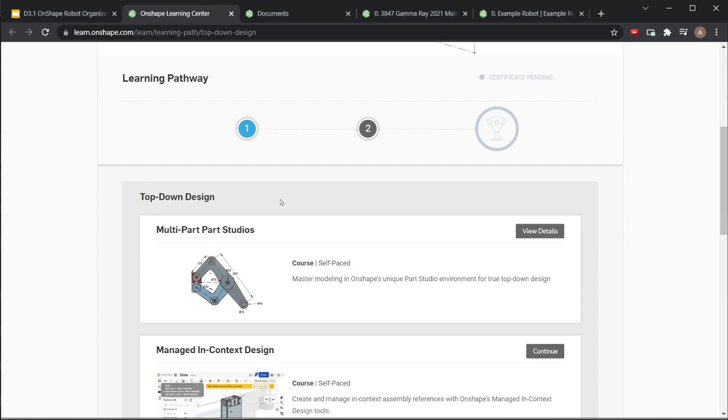They have the full learning pathway on these 3 different types of some of the different things that we use to make our robot process work, and they're going to have activities and everything for you all the way through it. So I highly recommend doing that. It has a lot of really nice stuff, and you can go through the videos pretty quickly. You don't have to listen to all of it, and you can speed them up and skip through. But it definitely is a nice way to get comfortable with a lot of the individual tools. And this presentation will go over a lot of the concepts, but not necessarily exactly how to do everything.

So the idea with top-down modeling is that we're going to use a primary document that's going to hold a lot of the information about the entire robot. And then in separate documents, we're going to use that information to make the actual robot parts and make sure everything fits together and make each individual mechanism.

And so if we do it all right, if we update the sketches inside that primary document, or if we update different parts of that primary document, all the other mechanisms are going to update and change the way we want them to. So it keeps everything in a nice cohesive unit. It makes sure everything in the robot's going to work together, and we can keep using all aspects of the robot, and multiple people can be designing, and it just kind of all works.

What this means is we're going to have multiple documents. So in our OnShape folder, what it looks like over here, and we can actually see the true one. So we have this folder that is Gamma Ray. The 0 in front of it just helps us put it at the top of our folder organization. So this will get off of 0 once we're making a new robot. The 0 robot is whatever we're currently working on.

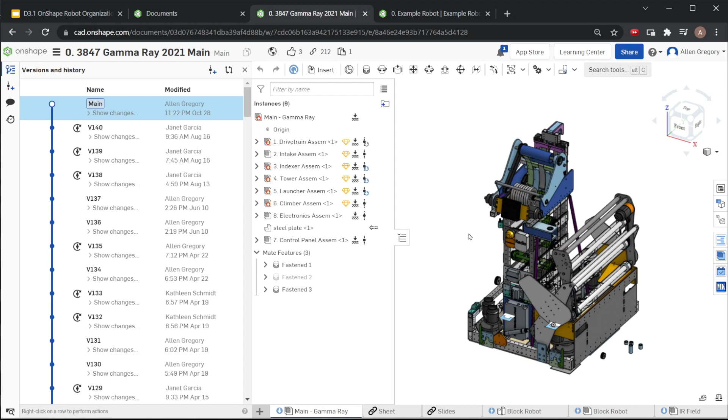It gets a little crazy. So this is version 141 of this robot right now. It's very possible you're going to be versioning 4 or 5 times in the span of a few minutes, just spitting out versions if you're going back and forth between documents and you just see how their updates affect each other. And it doesn't affect anything to just make a new version.

So I can just hit create version right here, hit create, and it's fine. And you can just do that over and over again. We don't really need to put too many comments in on any of just the minor versions that we're doing. It's not a big deal to tell them what they are, or name them in any way.

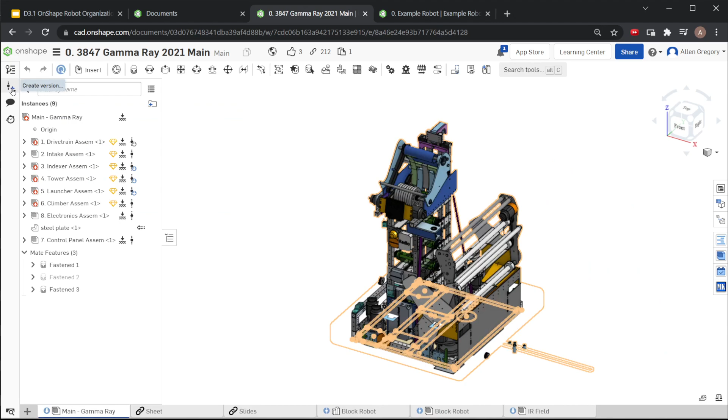When we do create version, if there's some big change, you can definitely go in, put a description, put a specific name in there if you want. But most of the time, if it's just a minor update, you can just leave the number and move on. But we're going to be doing that for pretty much all of the documents constantly as we edit. Anytime you make a change, even if you edit anything and you leave, you should always make a version. It's almost like saving your work.

OnShape saves everything for us all the time, but making that little version will let everyone else in other documents see the change has happened, so they don't have to go and check or anything.

There is a tool called pin reference that lets us lock versions if we don't want certain things to update. We shouldn't really be doing that for documents we control. It is useful for things like the MKCAD CAD library, where other people are owners of those documents and we're just importing them and using them. It's useful to pin reference, so if there's weird updates we don't want, we can make sure we're using the correct version of a certain external document.

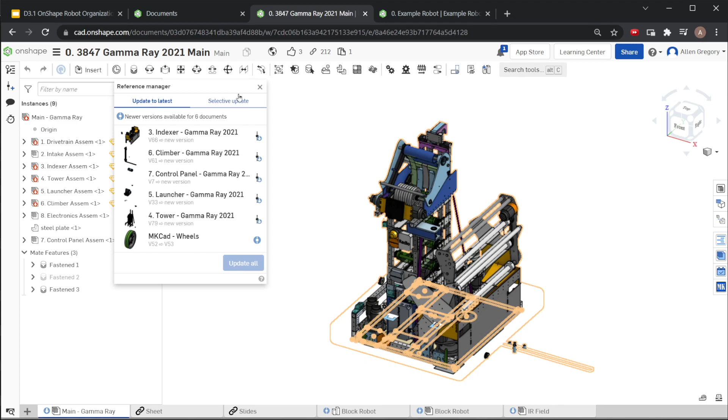So if you click up here, you can update all of the documents. We have a couple that may need some updating. If I click this, it'll let me update all of those different documents. But like MKCAD wheels, oh, it might actually let me update that, because that is a full version update. So we can go in and get all of these changes and they'll propagate into our full assembly. Slowly, but it will. Okay, we'll come back to that.

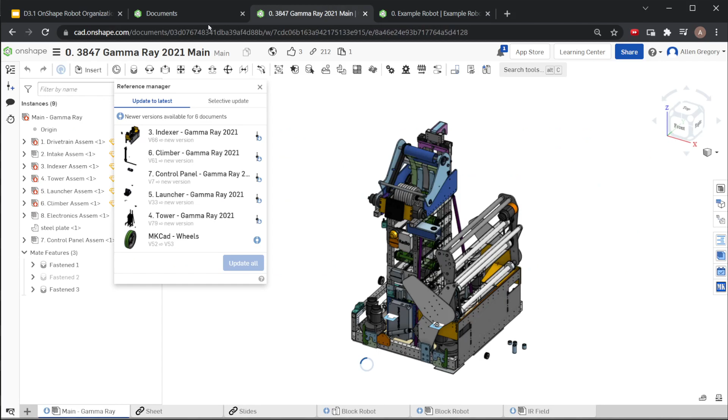When we create all these other mechanisms and work between multiple documents, it's very useful that we keep the relative positions of the parts in the same space. This isn't necessarily important if you're making a single part in a part studio that we're going to import into the robot, but when we have an entire subsystem, it becomes more important. So if we look at the indexer part studio, when it loads, we'll see the origin is in the exact same spot as the origin of our main robot document and all of our assemblies.

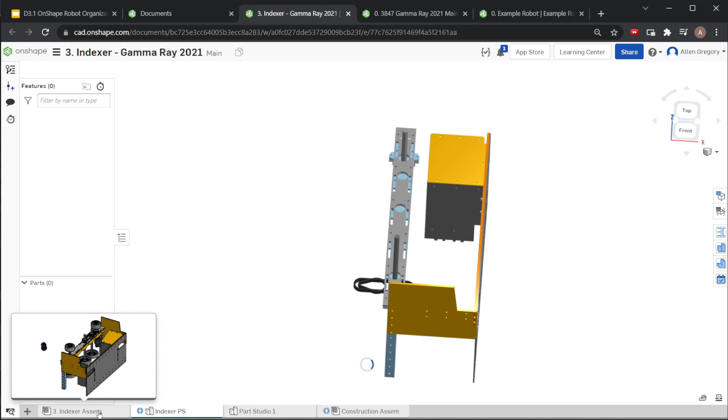So when we insert them into an assembly, OnShape knows where the origin is and automatically puts the part in the same place in relation to it. That makes it really easy for us to mate things and make sure certain parts stay in space where we want them. If we move a hole on some other part, that part doesn't necessarily move with it. If we want our intake to stay the same distance from the ground, we can do that easily with the origin maintaining the same location in each document.

OnShape, of course, is not loading well tonight, so that makes it a little trickier to show what I want. Why not? Okay.

Okay, so this is the example robot for a couple other things later. This is loading fine. Okay, there it goes. All right. So this is what I want to see. So this is the part studio. This is where we actually create all of these panels, any of the custom parts like these shafts. All of these custom parts are modeled in this part studio.

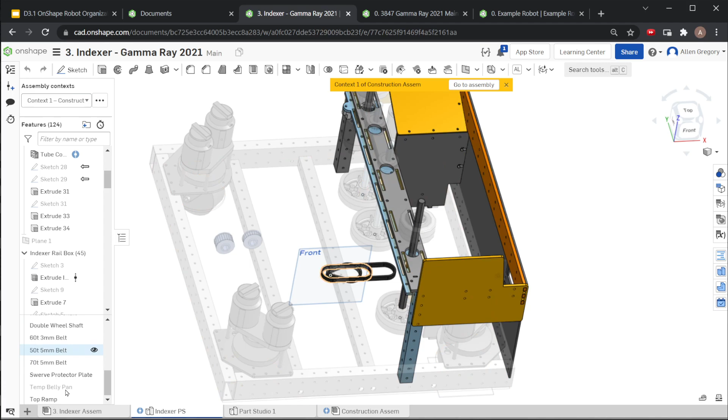So we can see all the parts for the indexer coming down here. This has some stuff that probably needs to be cleaned up, whether it was still an actual part or some things that aren't in the right spot. But largely it's in an okay spot. And we can see the origin is right here in the center, and that's the same as where it is for the whole document.

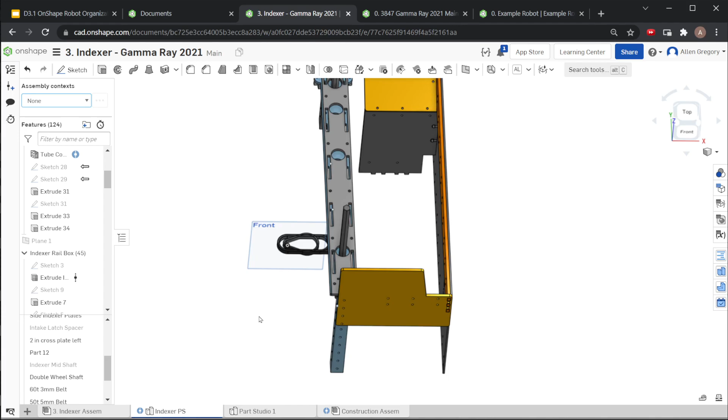We'll look at what in context assemblies are in just a little bit, or in context editing. That's what all those transparent parts were, the in context thing, so we could see the rest of the robot. But this is how we modeled it, and we just make sure the origin is in the same spot in relation to our part. So we actually use that in context editing to let us model it all.

And then when we come over to the assembly, we should be able to see it. This was loaded. Okay. We should be able to see that when we insert it, it stays right in the correct space. Maybe. We might be able to do that here. So if we hide the indexer here, and if I come up and I insert a new version of the indexer,

one of the other things, I don't think I have this listed, but if you make a folder and you make a tag with your robot in it, it makes it very easy to get back to all the documents for the robot. So I can come up and go to indexer, and I can put the indexer in place. If I just click on it, it loads immediately, and it's in the right spot for me to then mate into if I wanted to.

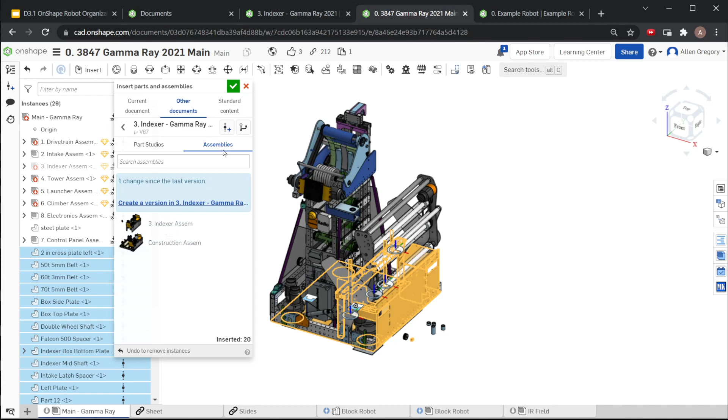I don't want to do that because I didn't actually click the assembly. I clicked all the parts, which I definitely don't want. So I need to remove all those. We can insert again and show that again. So gamma ray, indexer. If I flip over to assemblies, we know we want to insert that indexer assembly. And when I put it in, it's already in the right spot.

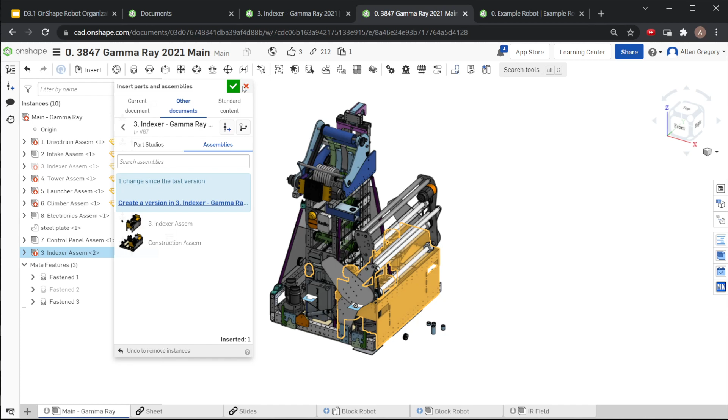I can move my cursor and put it somewhere else, but as long as I bring my cursor back up over here, it's already there. It makes it really fast to find mating holes that I want. I could even fix it into place if I need to. There's a lot of things you can do to keep it in the right orientation to the rest of the robot without having to worry exactly about where it's going to be. OnShape just does it for you if you model everything in relation to the origin. Okay.

So how do we actually go through the top-down modeling and make everything sync up? One of the ways we're able to do that now, and this is something we weren't able to really do on Gamma because we didn't know about this tool yet, one of the mentors on another FRC team created a feature script, which is custom code that you can run in OnShape. A lot of our other feature scripts are very handy, but this one allows us to use variables in multiple documents. So it's a variable library that we can create.

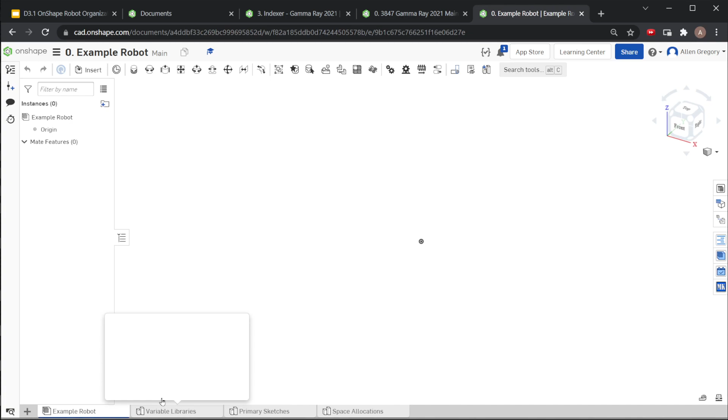So in our example robot, if this was our starting robot for 2022, one of our tabs in the 0 document, that primary document, would be this variable library part studio. And all that would be in here is this variable library. If you want to create a variable library, you just do it from your feature scripts down here. There's a variable library button, and I can create one, give it a name, and add things to it. I'm just going to edit the one that I already have. So we have our primary variables document here.

It says primary variables. And I can go in and I can add things like a ground clearance variable. So if I edit this in other documents, we could have it set how much ground clearance we want on the robot. We could set the length and width of the robot. We can set the height of the robot, an expansion limit. So like any global variable, things that kind of define the whole robot that might be used in multiple documents, anything like that can be in this variable library.

We can also have a team variable library that's separate from any one robot document that we could import. So if we have things that help us use the router or laser cutter better, like tolerances or gaps or certain things that you do for equations, all of those could be built into these variable libraries. And so you could store one, so we're not having to always remember how to do something. We can just type in whatever the word is for it and pull out that variable really easily.

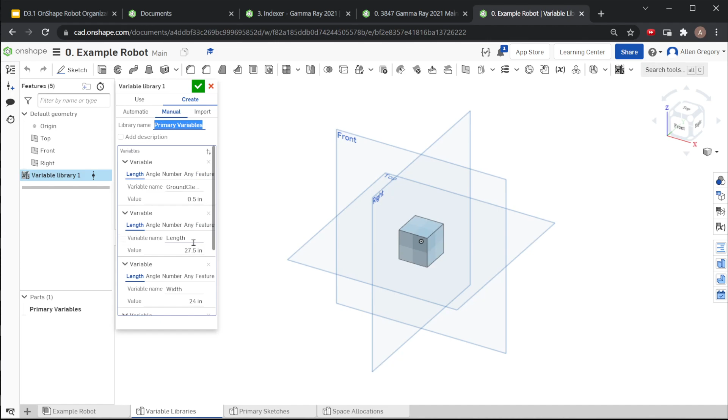So if I double click here, we can see it doesn't actually say the number. It just has the #length, and that lets it know to get that value from the variable library. If I come in here and I edit it, I can make the robot be like, oh, we messed up. We need the robot to be a little bit longer. It's going to be 28 inches now. When I come back over here, it's automatically 28.

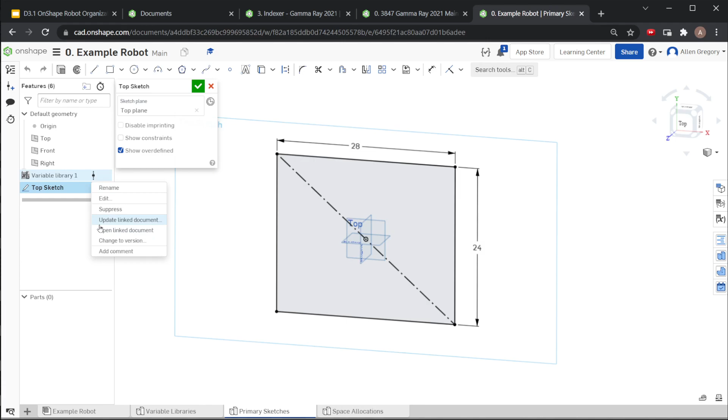So you can do the same thing across all of our documents, and we can keep those variables and those numbers in place. And if you edit the variable library once, it's going to extrapolate out to the rest of the documents when you update it. So when it's in a different document, you'll have to tell it to update, which is fine. But it'll make it so those changes go out to all the documents, and we can keep everything synced together, which is what we want. Okay.

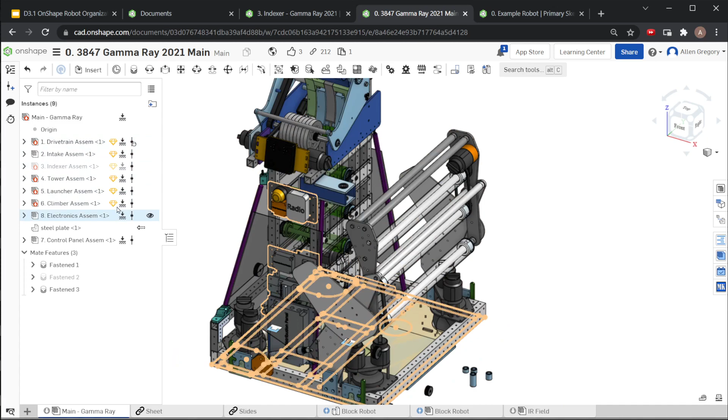The primary assembly. So the other part of that main document, which we already looked at, is our primary assembly. This assembly is just going to have an instance of each of our subsystems in place. We broke our model a little bit. There's an extra part here called steel plate, which was modeled somewhere else really quickly, and that's how we modeled the weight plate that goes on the bottom of the robot. Ideally, this would have been done properly in drivetrain and wouldn't have been here. So this should just have the 8 assemblies in it. That should be all there are.

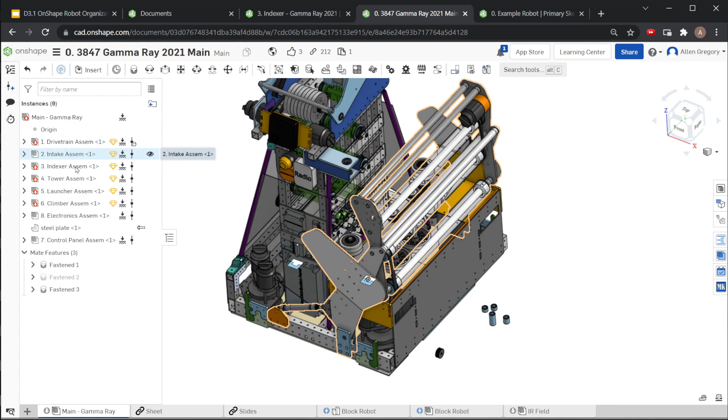We have some different things fastened in place. There's probably some mates and things that we could have done better, because there should be a mate for each of these 8 assemblies, and there aren't right now. So some of them end up being fixed, which does work, but we may want to mate the origins better. It's kind of the same thing as fixing it anyway.

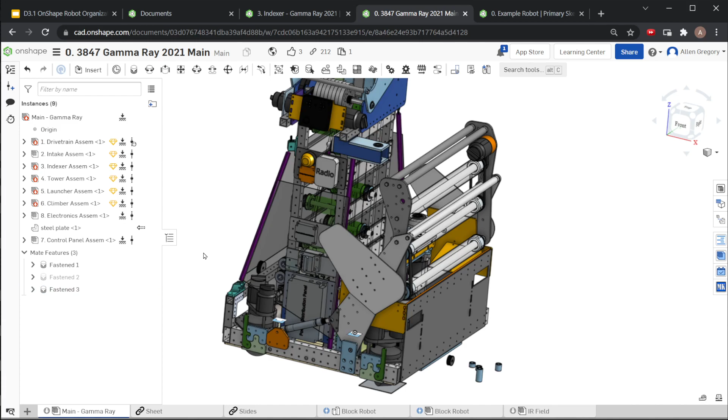Okay, so this document is what we consider the main file, and this one needs to be what's actually functional and working. So preferably we'd figure out why there's just parts sitting out here, and we'd get rid of those from whatever assembly they're coming from. So these are in the tower assembly, so ideally we wouldn't want those. We'd want to get those out. I think these might have been done at Texas Cup when we were working on something, so we haven't cleaned them up fully.

So this is the one that's viewable by everyone. For our teams, we'll publish this version of the document, so this has the full robot and everything in it.

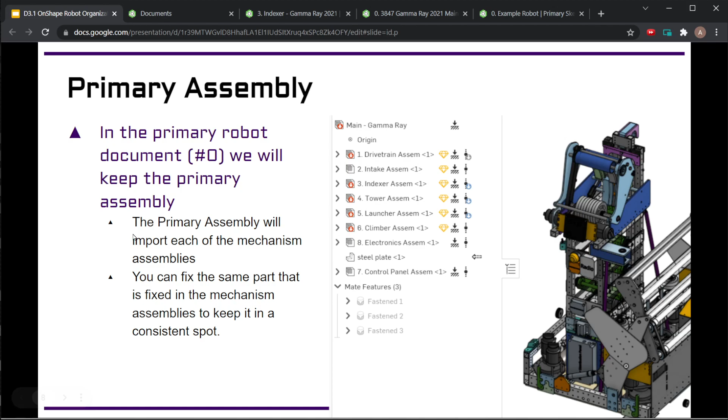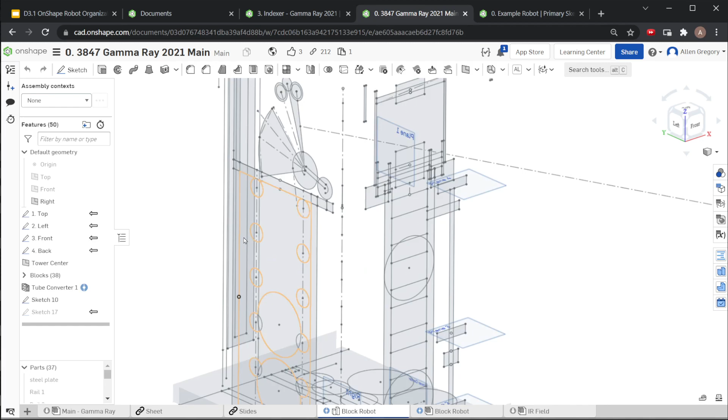The next part, and one of the ways that we did a lot in Gamma, is we have primary sketches. So we didn't separate things as well because we didn't exactly know what we were doing. We were still figuring it out here, but our primary sketches were in the same part studio as some of our block robot things that we did, which we'll talk about in just a little bit. But we have these sketches. We have a front, a right side of the robot. We have a top-down view of the robot. Then for this one, we also even have a back. So the back was basically just the climber sketch.

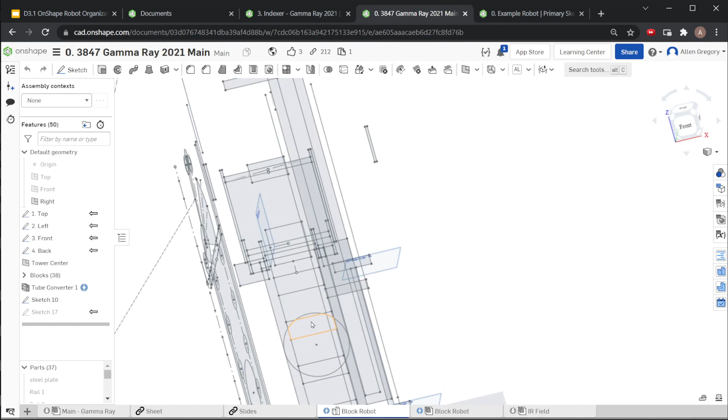And these let us define a lot of the geometry of all those mechanisms in a very simple 2D way. Make sure things aren't going to hit each other, get the generic sizing of everything down. There's not a lot of detail here. We know where the tubes are going to be. We know kind of where the rollers are going to be. We did some of the hood spacing. There's a lot of things that are definitely missing in this, but we're getting close to reasonable to where we know, okay, we can do enough from here that we can do the rest of the design.

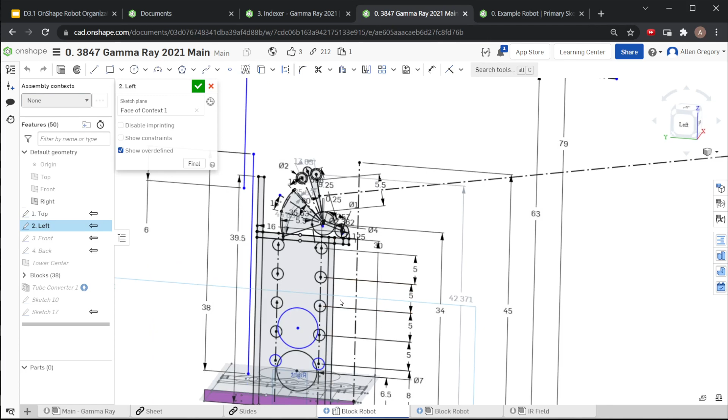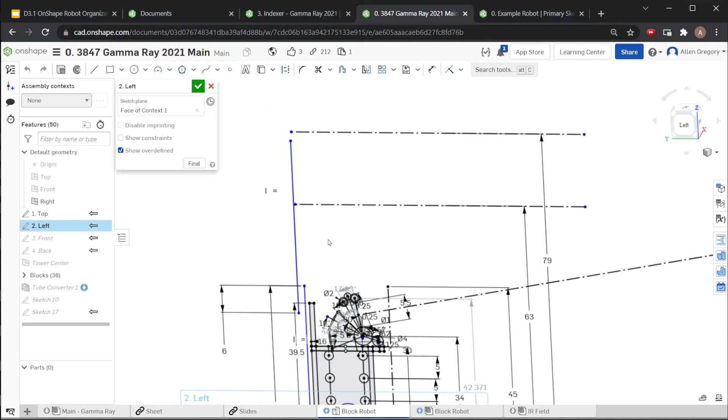So if we look at the left sketch, we can see all of these are a bunch of different spacings. We were doing some things in here to see our actual shot trajectories and hood angles. Some of these probably should have been multiple sketches. A lot of this probably should have been brought out, but this allowed us to keep all the hood things happening right here. Some of the climb stuff, we were worried about climb height, so we did some quick sketching to figure out if we could reach the bar.

There's a lot of simple things that we can do in 2D that allow us to get a general idea of how we're going to solve the problems of building the robot without having to have real parts in place, real dimensions, gears, belts, any of that quite yet. We just have to be accounting for it while we're sketching, making sure there's room for everything. But we don't necessarily know exactly how everything's going to work. So even the motor points, where we're going to mount the motors for the tower, none of that's in here. We know there's enough space here to do it, and we just left it at that, and then that was on the person designing the tower mechanism to actually make sure it all fits.

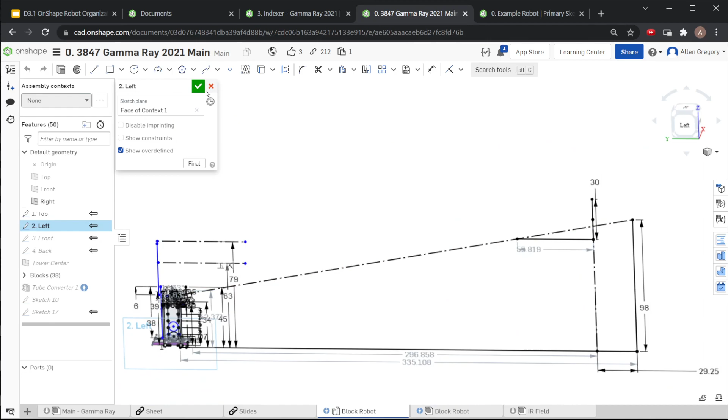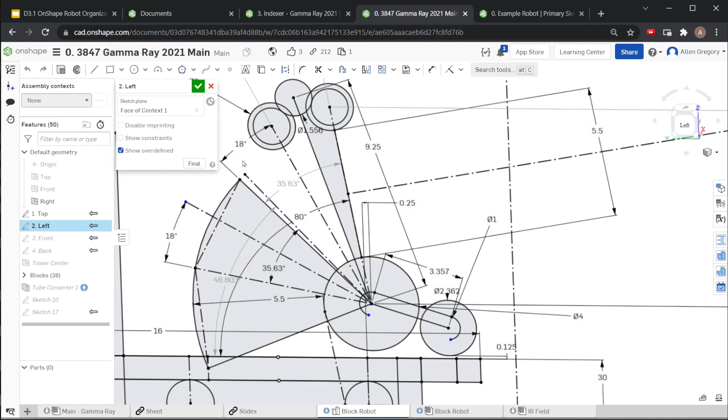So that's the goal with the sketches, to just give enough information that we're comfortable that the rest of the robot is going to work with what we're sketching. So some of it gets more detailed, like in here, there's a lot of details into exactly how the hood should work, the compression to the rollers, belt paths got calculated in here. There's a lot of stuff that had to get calculated in this, so it probably should have been its own sketch to keep it a little bit simpler, but it did work for what we wanted it to, so it was okay.

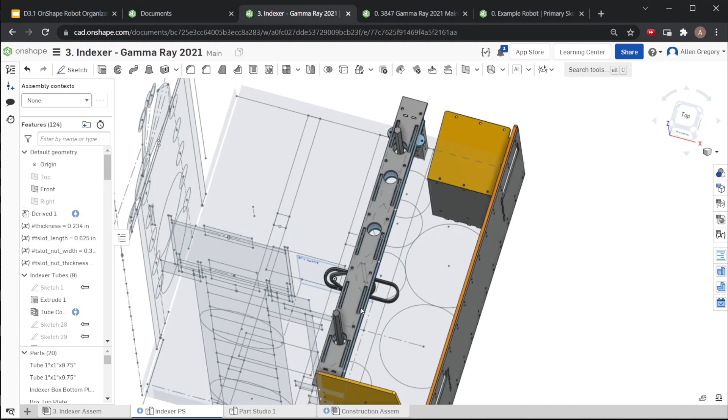These sketches get brought into the part studios. They get derived into the part studios. So we have this derived right here. So we can literally be using that to create our sketches. So this top-down view has where some of the wheels for the indexer are going to be. It has where the shafts are going to be. And so we can use this whole shape and all these lines to model our parts and keep everything in place in relation to the origin. So this is one of the ways that we get that origin to be in the same place, because we're modeling everything off of these primary sketches. And that allows us to get everything where we need it to be.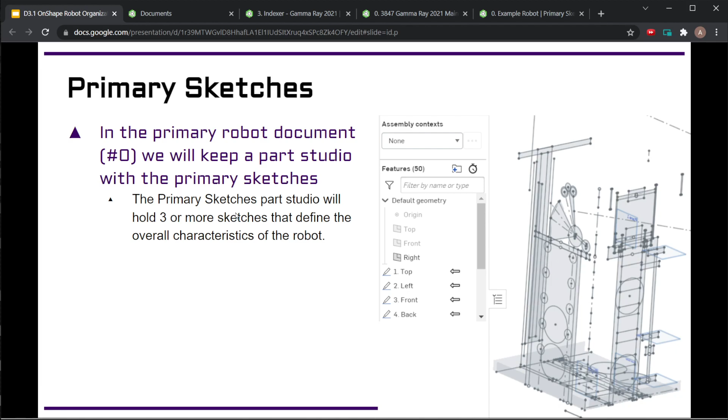One of the things we did in different ways, and we've kind of done, but not as much as I think we'll be able to do next year, I think we're going to use it a little bit more efficiently, is doing rough 3D models, or even just space claims. So you can say, okay, this is how big this part of the robot can be. This is how big this part of the robot can be.

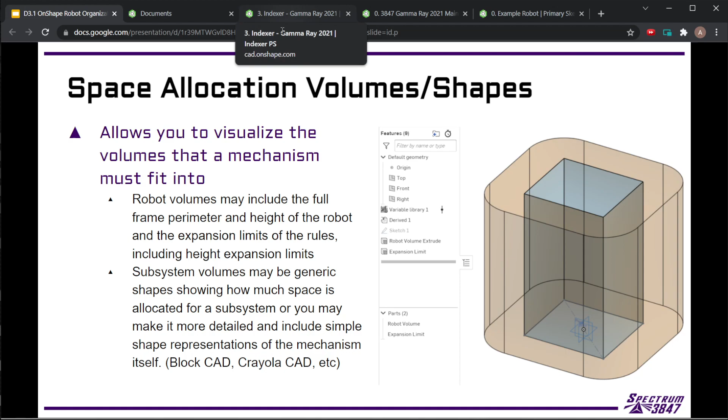And you just make boxes, shapes, whatever, that are relatively fast, so that the people CADing the full mechanisms can know where they can actually put their resources and where they can model things into. This can get a little bit more detailed and get into something closer to block CAD or Crayola CAD, sort of like crayons. We have some of that in here.

Let me see if I can show all the blocks, I think. What's going on? Oh, no, I just need to show parts. That's what I need to do. Okay.

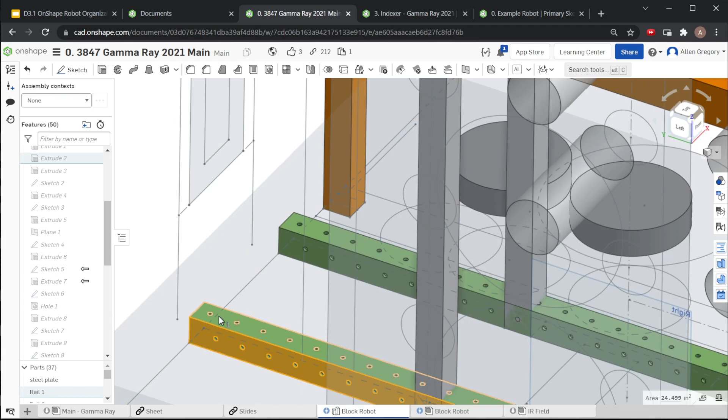So we have this bit of the robot. We ended up getting a little bit too detailed in some parts. So we put rails going through. These don't necessarily take a long time to CAD, since these are just done with Julia's tube converter. These are pretty fast. There's a feature script for it, so you can even put holes in it and stuff. I think we were just messing around with the tube converter there. It's the only reason we put holes in it.

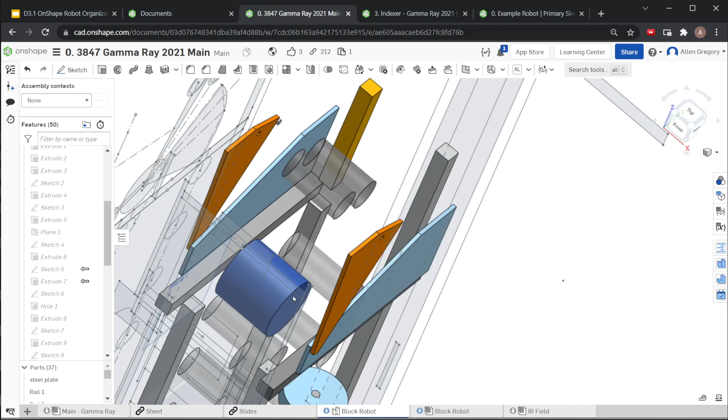But a lot of these other ones are just simple shapes that we can CAD really quickly and get an idea of how the robot's going to look. None of this is the real hood or rollers or anything like that, right? The shooter wheel's just a big cylinder. This can take less than a minute to make any of these parts. Indexer, we probably took a little bit more time on.

Briefly, in the same folder, we have a few of the prototypes. So we actually had a test indexer. This was the only part of Gamma that we really prototyped at all. So we CAD'd up a very quick prototype for it, and we were able to run that. And then we were able to use some of that prototype information to make this CAD and make sure we knew it was going to work. This was a pretty critical piece to the actual robot working at all, so we wanted to definitely make sure this was happening correctly.

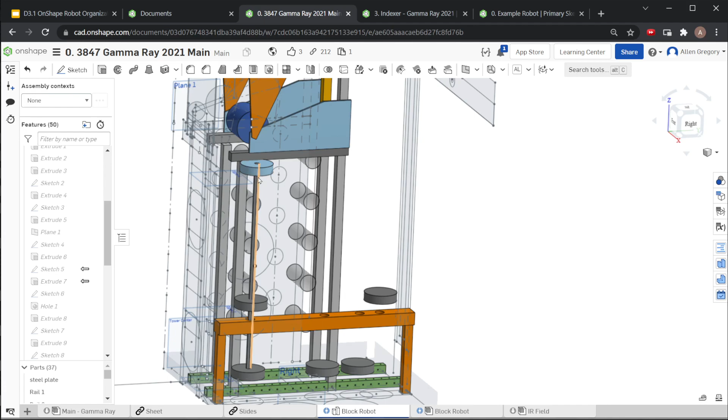It had some old ideas. At some point we were planning to use this same shaft to control the control panel and spin it in Infinite Recharge. That never happened. We never put a control panel mechanism on this robot. But that was the original idea. So some of those are probably a little bit too far out of scope of what block CAD is, but this gets you there.

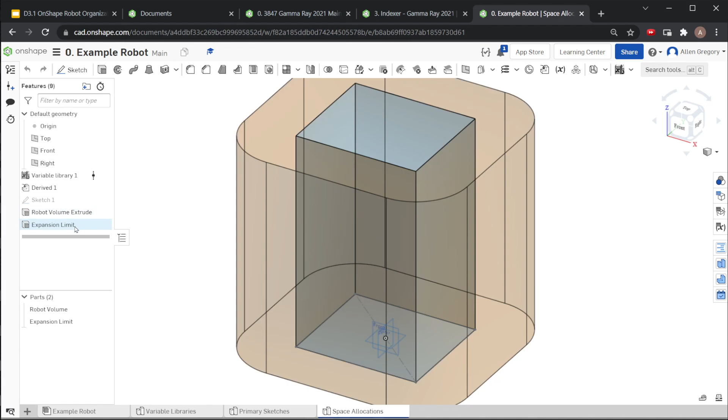What we were able to do that we hadn't done with Gamma that we're excited about is doing more of these generic space things. So here we have space allocation, so we can see this is the robot volume. So we could put this block on top of our full robot, and we can tell if anything is at a frame perimeter. This right here is the expansion limit based on the rules, so you're only allowed to expand so far past your frame perimeter.

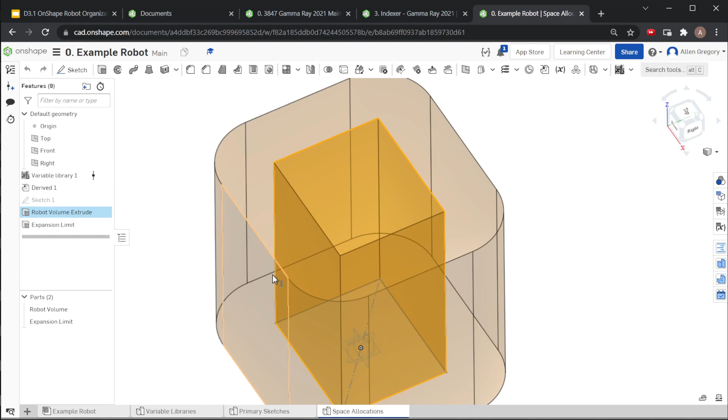So we could put this over the robot with the intake deployed, and we could see if our intake is too far out. Are we reaching past how far we're allowed to reach or not?

And we don't have to sit there and try to bring back specific measurements to the end of a roller or to a belt or whatever we're trying to measure to. We can just see if it fits the volume that we're constrained to by the rules. So things like that are really simple.

We can add some details to this if we want to limit the volume of the robot in certain areas. Maybe we could exactly show where the intake can't be, so we could block off some room for the indexer and say, okay, the indexer is in this space. The intake needs to make sure it's not violating any of the indexer space before we even CAD the whole indexer, right?

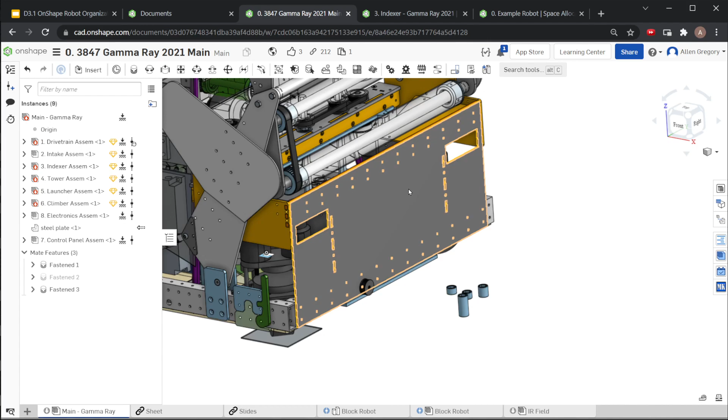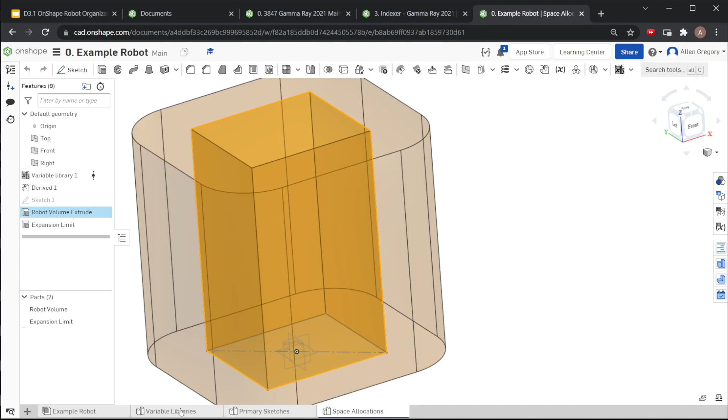So it allows for multiple people to be developing parts of the robot without having to wait on any of the other parts of the robot to be finished. If we can specifically say this mechanism has this much space, this mechanism has this much space, we can go a lot faster and get our work done without waiting and having any communication problems or people wondering exactly what they can and can't do. We can do that with the definitions that we'll be able to set up in the main robot document.

Okay, so recapping what goes into a primary document. Our primary document is going to have our main assembly. It's going to have our primary variable library. It's going to have our primary sketches, which is going to be at least 3. You probably need at least a top, front, and left, but you can have extras for more specific sketches for certain mechanisms, if you want to do them in the primary document to make sure they're interacting with everything else properly, like we did with the climber. So multiple is fine in there.

And we're also going to have our space allocation document, and you may also have some version of a Crayola block robot as well. So those might be separate documents. Anything like that, just so you can get a more 3D picture of exactly what the robot's going to look like without having to do a lot of the detailed CAD yet. So it allows us to speed up the process and figure out where things are going to hit, interfere, all the packaging problems where we're trying to fit all the stuff together. The more we can work out early on in these primary, simple, easy to use, easy to change documents before we do the details, the better our season is going to be.

Okay, so how do we actually use these? We talked about Derive briefly when we were talking about the sketches. And this is one of the places where going through that top-down modeling learning pathway is really helpful. It shows exactly how to use Derive everywhere, exactly how the tool works. They do a really good job of training you how to use the Derive feature. But the main idea is that we are able to import those sketches wherever we need to.

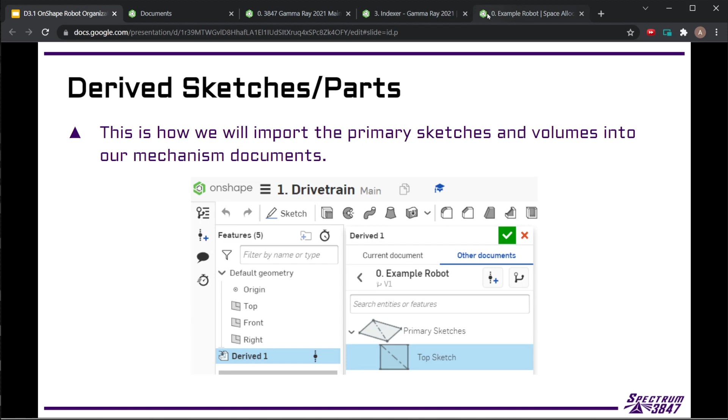So like I showed here already, if we come in and edit this, it'll show you what we're grabbing. We're having to grab these sketches. Preferably in the future, our main robot will only have the primary sketches in that document. We don't want to have all these other parts and things to make it harder to find what we need to derive in when we just want the sketches. So hopefully that'll all be easier and more organized on our future robots.

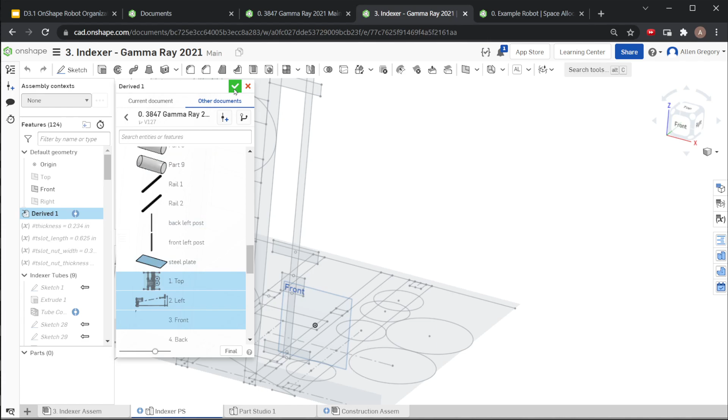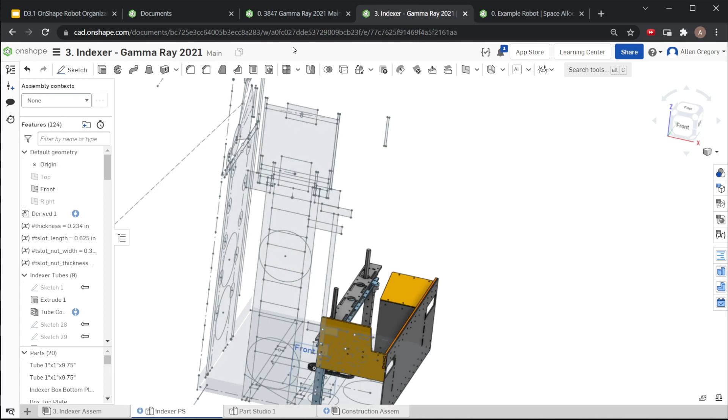But you just select the sketches and they bring them in already in place where we need them to be. Then we can use those sketches in any of these entities to make new parts as we need. And that makes it really easy because you're not just trying to create something out of nothing. We have this base idea of what the mechanism is going to be already. And then we just have to put in all the details, bolt holes and slots, and all the final CAD to make it actually a buildable robot, and not just these sketch lines.

The second thing we can do, because the sketches aren't always enough detail. The sketches and those space allocations aren't going to be a lot of detail, and they're going to help get every mechanism started.

But as we get closer and closer to being finished, all of the mechanisms kind of need to interact with each other, where you have things mounting to each other. You want to make sure you're exactly not hitting something else. Nothing's crossing, nothing's taking up an area. You don't have intersecting parts where two volumes are trying to be in the same space.

So to do that, we use a concept that we actually started using back in SolidWorks, but we moved over to here, called construction assemblies. So this assembly is never a final product. We're never going to import this assembly into anything. This construction assembly exists just to help us construct the parts in our mechanism and in our part studio. So Indexer's construction assembly is here, and we can kind of see what it looks like.

So basically what a construction assembly is, we just make a new assembly in the mechanism document. The first thing we import is the entire main assembly from this document. So it's a little bit weird because there is a version of Indexer that we're also importing into here. But this version of Indexer is only whatever the old version is that we've versioned and then imported into here. So it's kind of recursive. There's a bit of a loop that happens, and you can get into a versioning loop if you make some weird references.

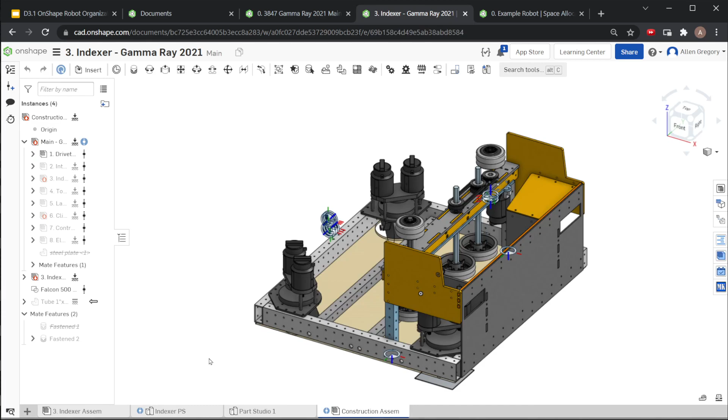So most of the time we'll come in and immediately hide this version of Indexer. We don't want to see this in this construction assembly. We only want to use our fully updated Indexer. We're going to insert, from our assembly, the full assembly into this assembly. So now we have this indexer. This indexer is the one that's directly attached here. It doesn't need to be versioned ever because they're in the same document.

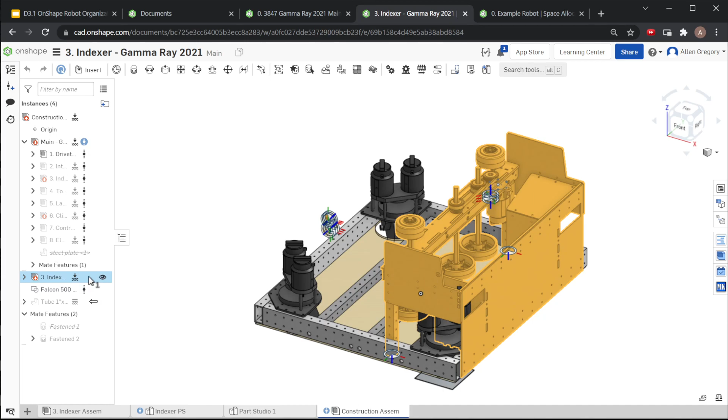So it's always updating. If I change something over here, can I drag something around? So if I drag this pulley around, it should. Oh, it's not. It's fixed. That's why I have to ungroup it or something. There's a way to make it update. I'd have to go through and do it. But basically, it'll update faster and work the way it's supposed to.

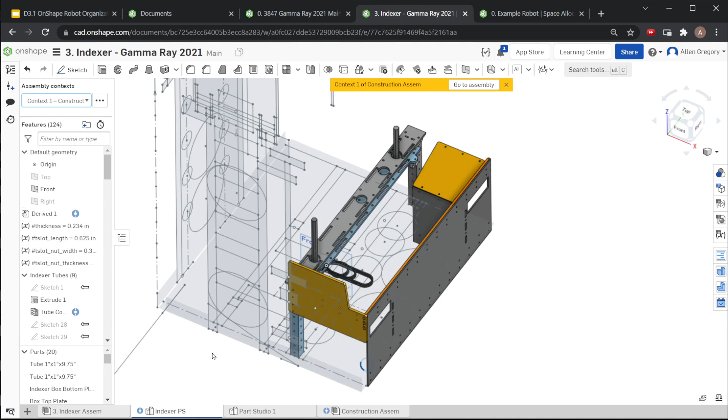But the biggest thing it lets us do is allow us to edit these parts in context in our Indexer Part Studio. So we have these assembly contexts, and if I come in and do construction assembly as the context, I then get to see a lot more of our actual robot, and I can reference to that if I need to. So we can sketch, put dimensions and things from it. It allows us to make sure things are actually attached in here.

So all of these hole patterns, we were able to just use the holes directly from the tube that's behind it. The tube that's behind this has all these holes in there. So we didn't have to try to get the dimensions and model them, and if I move the holes on this tube for some reason, the holes in this plate will automatically update. And so that's what we always want to worry about when we're talking about design intent.

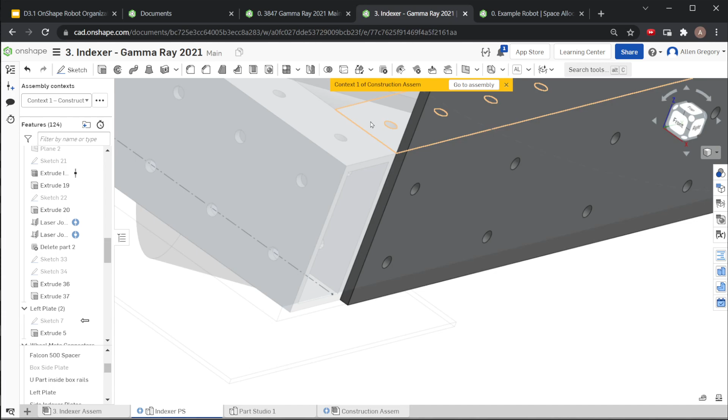If we know there have to be holes on the front of this, they're not in specific points to anything else but the holes behind it. So we want to make sure we're using that geometry. So if we ever update those holes, or if it moves, we want those holes to move and update as well. It just saves us a lot of time, saves us headache. We don't have to make parts over again in case we got one of these hole positions wrong. So the in-context assembly, allowing us to actually see the physical parts of the other parts of the robot, is super useful.

So if there's something else we needed, maybe we needed the actual tower. Let me see if it'll load fast enough so I can do this. Maybe not. Okay.

But yeah, so we shouldn't use in context for too much stuff. Ideally, the best thing it's used for is copying over hole locations, copying mounting locations, making sure things aren't touching. You don't want to dimension off of other things too much. It does get a little complicated. It'll slow things down if you're always just sketching on top of things that were done in context.

But specifically, copying holes and mounting locations is a really good use for in-context assemblies, and then just generally seeing that your entire mechanism is fitting on the robot the way you want it to. The set as primary instance function allows you to keep the part studio in context with the assembly, even if you like delete an old part or something. You can make it still work and know where the primary instance is, which is super helpful.

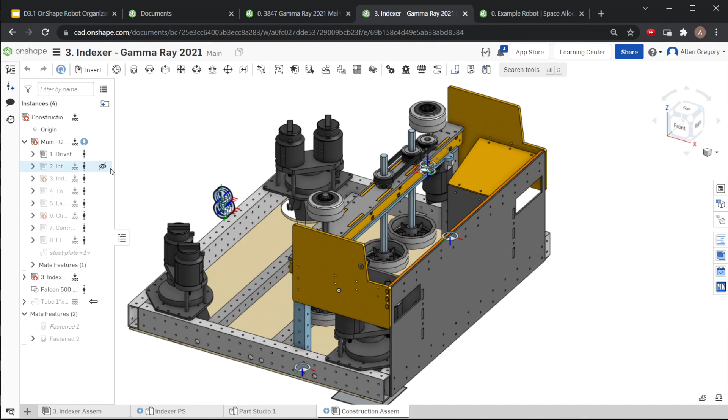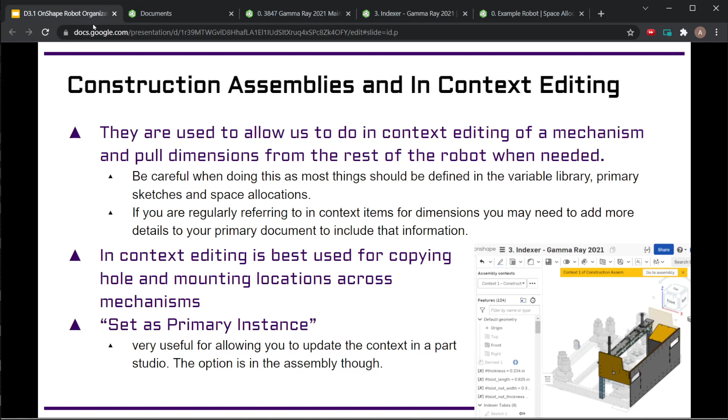If I go and show something like tower in here, if I come back into Indexer Part Studio, I can update context, and it should show me the tower in here as well, if I did that correctly. Okay, while it's doing that, we can move on. Okay, so recapping the document, and we can double check that that worked.

Each document for a mechanism is basically just going to have its main mechanism assembly. It's going to have a part studio where you're modeling most of the parts in, and then you can have multiple part studios. So it's very possible that you need more than one part studio to get the parts made in a reasonable way. Sometimes we've had parts that we knew we were going to make duplicates of, or maybe they need to have a bunch of configurations.

Anything like that, especially if you're putting configurations on a part or something, you don't want to do that in the main mechanism part studio. It gets really complicated. If there's things you're experimenting with, something that you're not quite sure how it's going to work, you probably don't want that in the main part studio for that mechanism. But any just kind of generic shape, things that are going to be modeled together and need to be referenced to the rest of the robot, plates, tubes, any of that sort of thing, we can model in the main part studio for the mechanism itself.

And then they're going to have that construction assembly. That's basically just how we can reference back to the entire rest of the robot inside of our part studio when we're modeling, to make those mounting holes easier, to make any final fit checks easier, without having to go and open the main document, or trying to edit anything in a weird way. It works pretty well for that process.

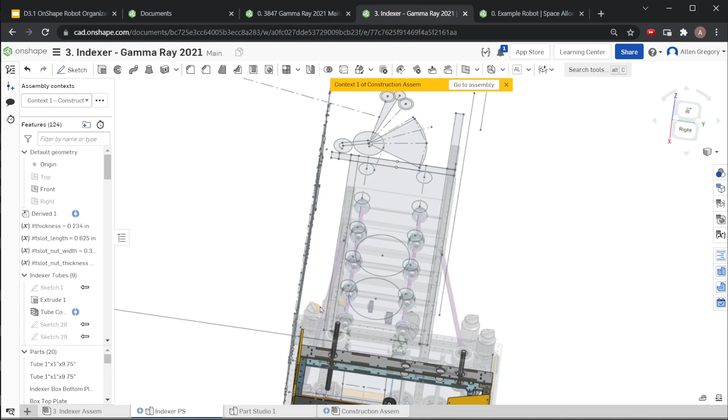Okay, so Indexer did get it fully updated, so now we have the whole tower in here. If we needed to check how close some of these support rails and things are going to be, maybe we're moving something out and we want to see how close this rod would be, we can get that dimension and make sure we're not hitting it. Same with any other parts of the tower. And it is a little bit tricky to see sometimes. It's not the easiest. But it works pretty well for what we need it to do.

Okay, one of the final pieces to letting our whole robot work is MKCAD, which is how we get most of our parts into the assembly. So if we're over in our indexer assembly and we need a new wheel or something, most of the time we're going to use MKCAD to do that. Maybe we will use MKCAD.

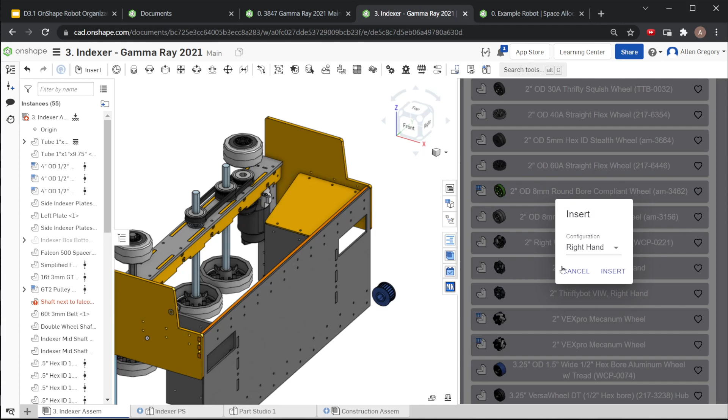Okay, so we could come down and we could get some specific wheel that we wanted out of MKCAD, and we could just put it in our document really easily. Maybe we needed a 2-inch mecanum wheel for some reason. We can go ahead and insert that, and it should load up on the origin for us, I believe. Maybe I should have used a simpler wheel.

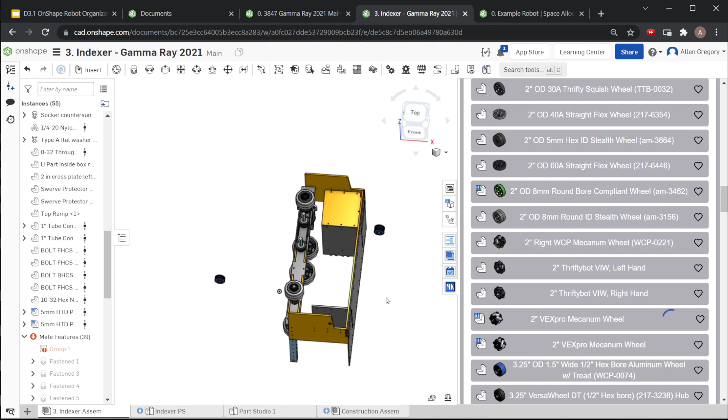Okay. So while that's loading, oh, there it goes. Okay. So yes, now that wheel's in place. It's normally a little bit faster than that. That was one of the slower times it's taken. It might be because I'm streaming.

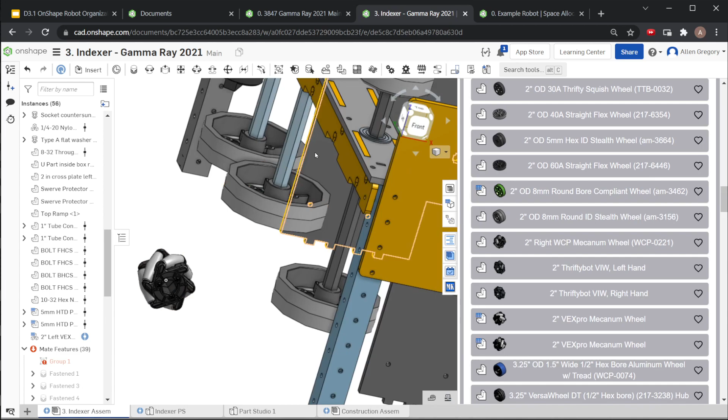You can grab that and put it in and mate it to wherever it needs to go in our assembly, and it would work fine. But the MKCAD doesn't have everything we need, so there's a lot of times there's parts that we make specifically, or there's things that only we use. So some of the times we'll have our own part library.

So inside of our 3847 general folder, which is just the main folder that gets shared with everybody, we'll get everybody's username, make sure everybody has access to this. We have our own CAD library for our parts. So there's some parts that are kind of experimental stuff, some things that we've just been working on. But one of the things we do have is like spectrum COTS parts.

There's ones that don't make sense necessarily to be in the full MKCAD or things that we've made ourselves or kind of edited, but they're things that we know we'll use on multiple robots. So this is like the camera module, and it's not a perfect camera module. It's an approximation of one that works well enough for what we need it to.

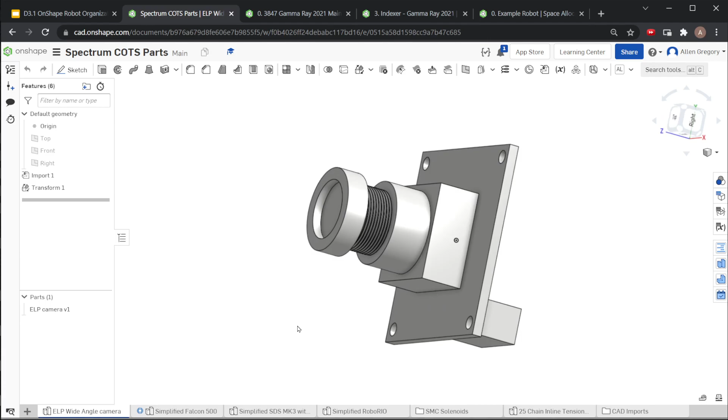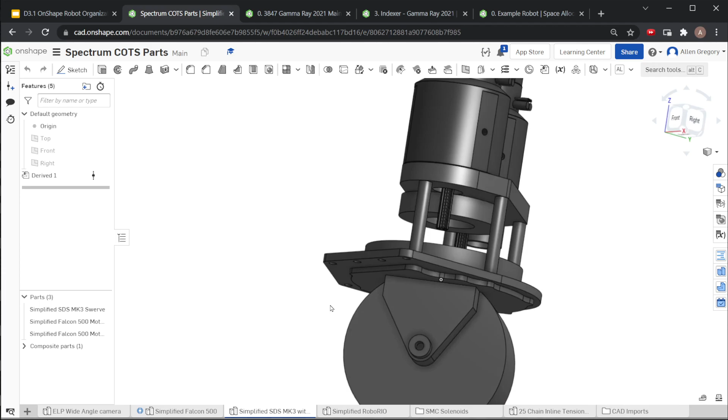We make some versions of the simplified motors and things that are a little bit different than some of the ones that MKCAD has. We made like a simplified swerve. Some of these things just help the files load faster if we don't need the full geometry of having like the gears and pulleys and everything. We just need enough to make sure our stuff's not hitting anything. This does a pretty good job of that.

I think our simplified RoboRio, we added the zip tie cutouts because they weren't on the other one, and we use those for modeling where we're going to zip tie the RoboRio down. There's a few other things, like we have specific solenoids that we use that not a lot of other teams do, so we make sure we have those. Anything like that, that's things that our team uses that not every other team does, or sometimes there's not in MKCAD yet.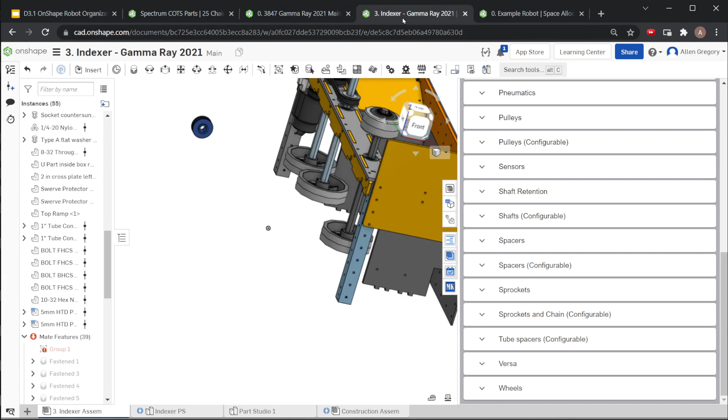So I think when we were modeling it, this chain tensioner wasn't in MKCAD at the time, but we still needed to put it in our robot, so we'll put it in our CAD library instead of directly adding it to any of our part documents. So in general, or our mechanism documents. So we shouldn't really be adding any COTS parts to our mechanism documents directly.

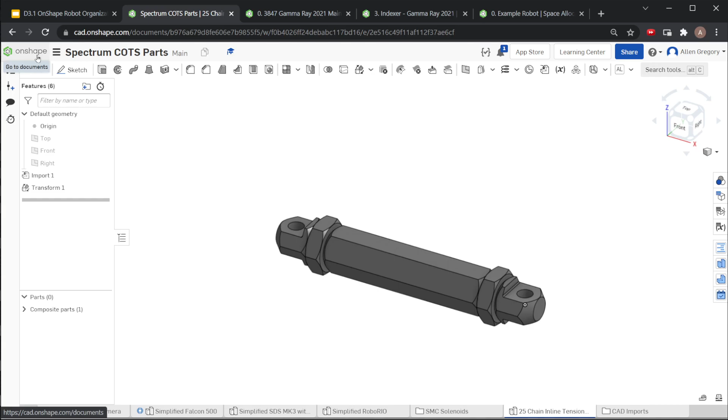We never really want to come in here and do import because it just gets confusing where that part lives and how we access it properly and anything like that. So if we're going to import it, we want to do that into one of our part libraries that we have somewhere in here. So maybe you have to make a new one if it's some part we created, or we would add it to one that already exists.

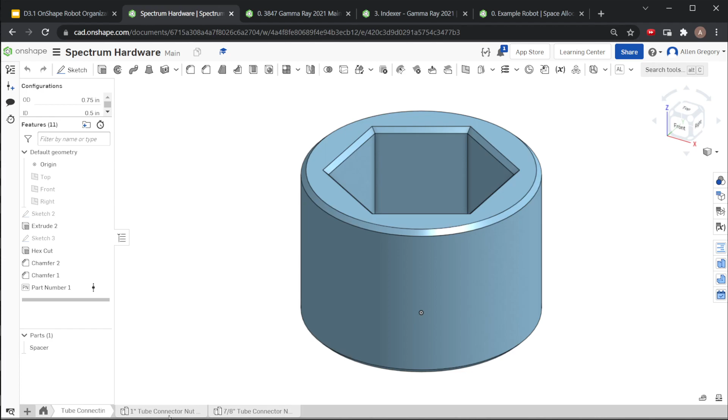Spectrum hardware is a little bit different. So this has some of the bushings and bearings, tube connector nuts, things like that that weren't in MKCAD, at least at the time. It might be now. MKCAD's always adding stuff. But little things like that that we may need to include in our robots. It makes it sometimes faster just to get the certain nuts and bolts that we use that may be in MKCAD, just may be harder to find. All of those types of things are here in our document for us and relatively easy to get to.

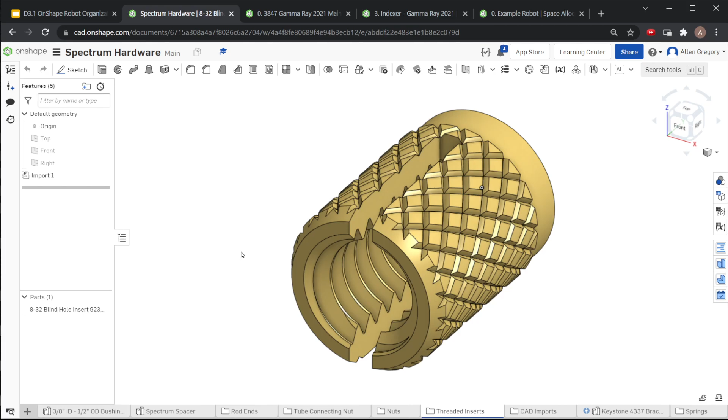And we'll expand, and they just allow us to keep adding them, keep expanding them. So it's better to add them in here once, so then if we use it on multiple robots or somebody else needs it on our robot, we can all benefit from the work of the one person who had to actually do the imports and make sure everything worked right.

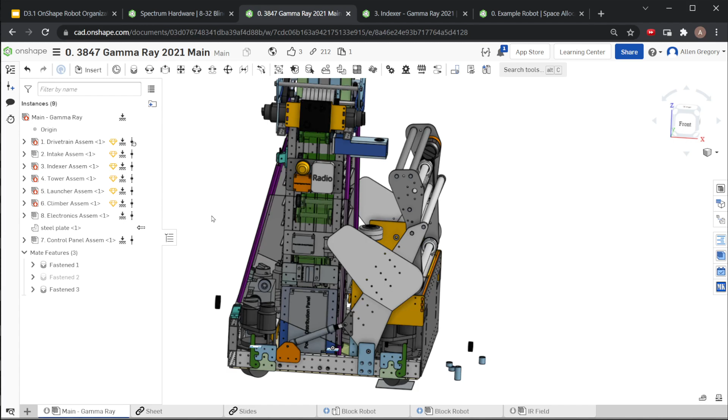Okay. So that's pretty much the process that we go through to organize and make sure the robot's working. A couple things, since we have a little bit more time, that we would normally do in other ways, but some of the things we do to also make sure we can help edit and organize things. There's a few things that are useful. So one of the plugins that exists is called like Link Tab, and it lets us put some of our Google Slides in ways that we like organize the robot outside of OnShape into OnShape.

So this is our design sheet, which we'll go over exactly how the design sheet works. At some point, I need to make a simpler version of it. This got a little bit too big and complicated, but it has a lot of really useful calculators and tools. So this helps us figure out exactly how the mounting for pneumatics works and how long they're going to be and what options are available.

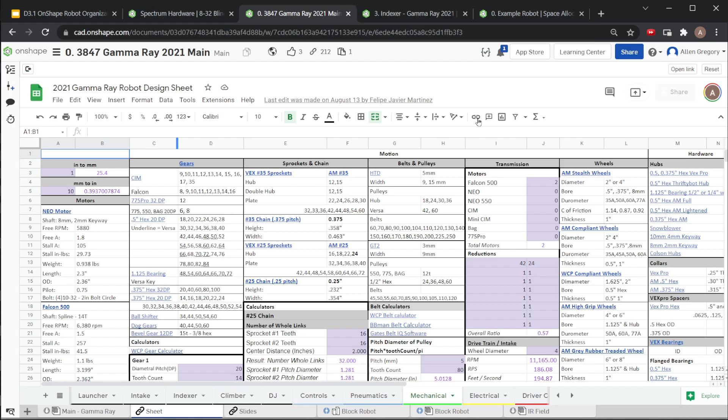The mechanical tab has so many things for how to calculate like chain and belts and everything. And so we can do this right here if we need to, if we don't have another tab open, or if we forget where the link is or something, it's already here ready to go.

This tab should be our Google Slides presentation where we keep all of our design slides. So this is how we as a team organize a lot of our group thoughts on how the robot works. These are also cool to go through if you weren't on the team when we were designing these or you weren't part of the process. Going through and looking at these is pretty neat. You can see where we got some of our ideas from.

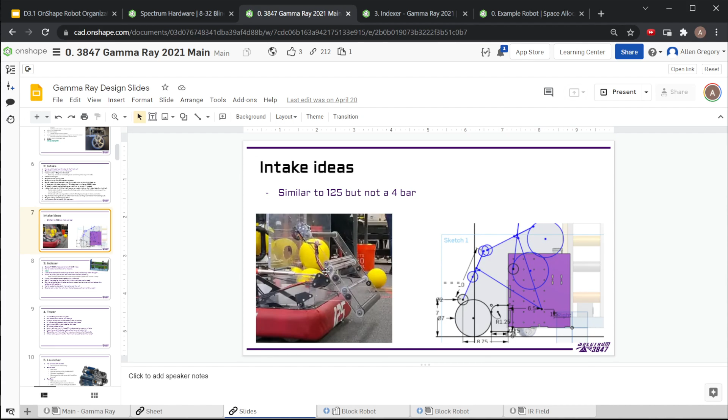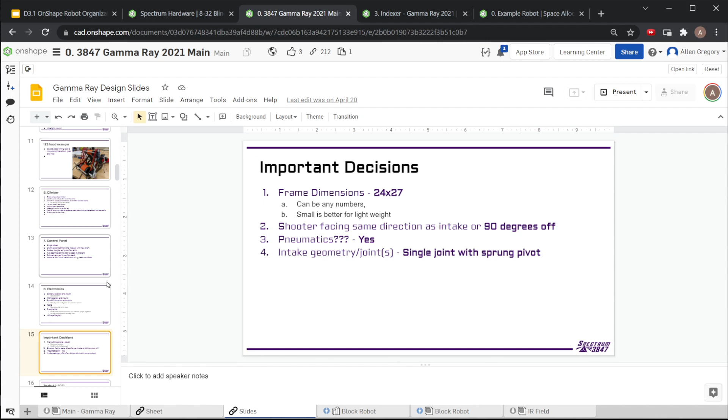So this is 125's robot. This is partly how we modeled where our intake came from based on theirs. They had some other geometry, but it worked out. Indexer, tower, all of these things we were looking at different ideas for how to make this robot. You can see kind of where it started. This is some of the block CAD that got there, and this goes through a pretty large chunk of our design process until we're pretty close to the end. We're figuring out some exact changes here towards the end.

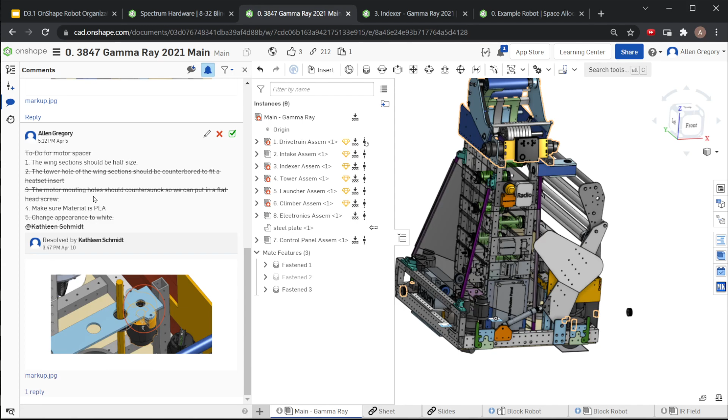The other feature of Onshape that's super useful is our ability to comment on things. So we can leave specific comments with how to fix things if we have certain problems. This is one of the ways that I review a lot of stuff for the various people working on the different mechanisms. So we have to-do lists that can get assigned out, so I can tell people exactly what they should change. Or if you see something that's interfering with one of your mechanisms, or if you're helping somebody and you leave some comments on what got done, it's really useful to be able to see exactly what needs to be changed.

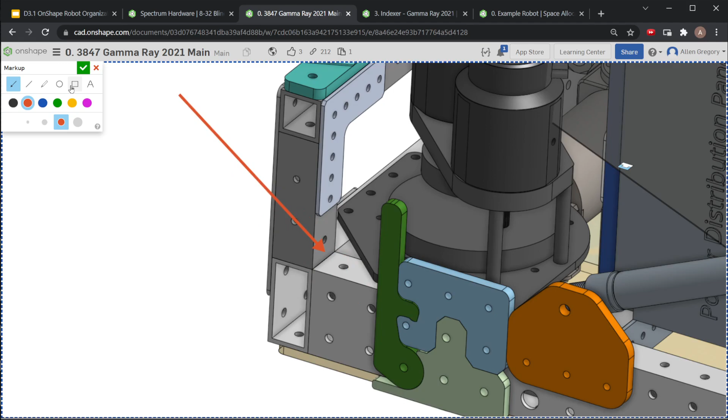So you can actually leave a comment. You can draw boxes and things. So I make a new comment here. I can mark up some section of the robot. So maybe we remembered this is actually a problem still on the robot. There's nothing connecting this tube at this angle, so this whole thing can kind of flex, which is a bit of an issue. So we could come in and point out here, maybe we could put a square there and be like, hey, we need a bracket here.

And you can assign it to different people. So I could tell Felipe to do it. He was working on parts of this stuff back there. You could tell whoever you want to do it. So that type of thing is very cool and powerful. If you at somebody, they get notified that there's something they should look at. So I'm very excited to be able to do that throughout build season. We'll be able to go a lot faster since we can always be reviewing the work that's going into the robots pretty constantly.

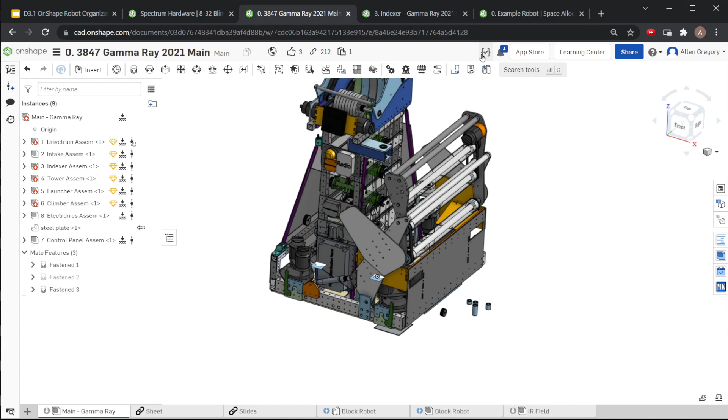There's no one else in this document at the moment, but you can also follow people, which is really cool. So you can watch people as they're CADing. You can double click on their little icon and it'll show you what they're looking at. So you can see what they're modifying at the time, make sure you're not modifying the same thing. And as you're going, you can see what they're doing and the progress they're making, which is really cool.

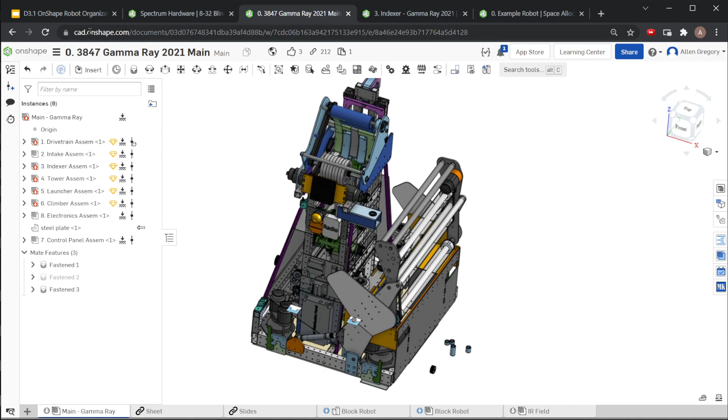Okay, I think that's most of how we do this. And again, I would definitely recommend going through the learning pathways on top-down design. They go through exactly how those different tools work. They talk about space allocations. They talk about master sketches. They walk through all of those and give a good idea of how it's used too. This is a practice that's used in industry, for how people are designing things in their actual jobs. And this is just how a lot of big projects get done in CAD.